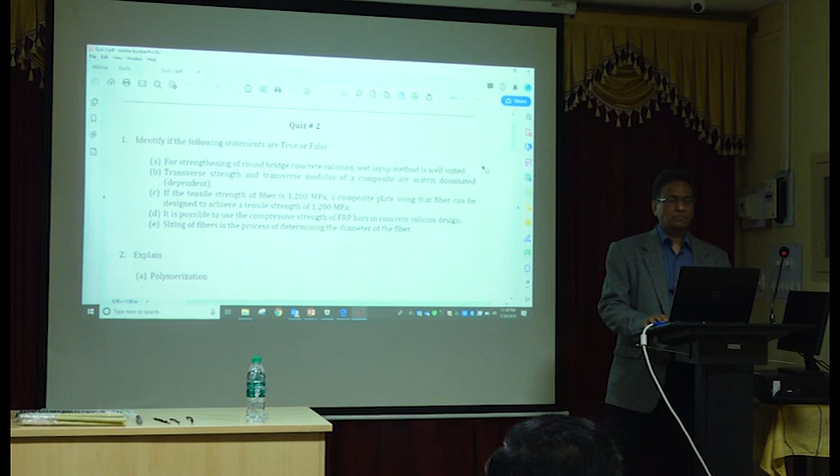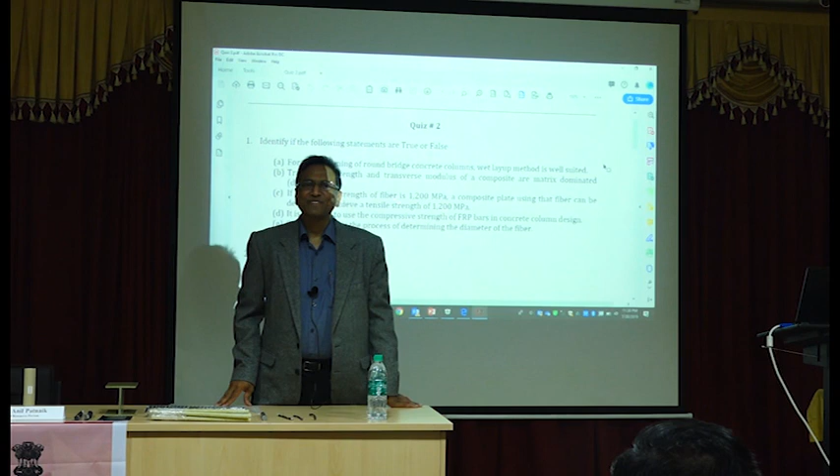First one, strengthening of round concrete columns, wet layup method is well suited. True or false? True. I mean, it can be true or false. If I don't seem to like the answer for true, you say, okay, false. No, but why? Why is it true or false? Yes, wrapping has to be done manually. Of course, you can do robotic, but that's also wet layup only. So, wet layup is well suited. So, that's a yes. It's true. Okay? Very good.

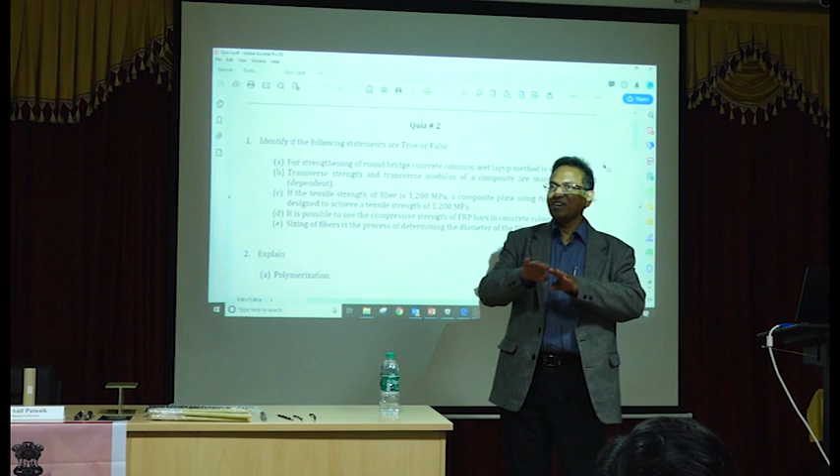Transverse strength and transverse modulus of composite are matrix dominated? Very good. True. That's correct. The longitudinal strength and longitudinal modulus, they are governed by fiber. Transverse strength, transverse modulus, everything is governed by matrix.

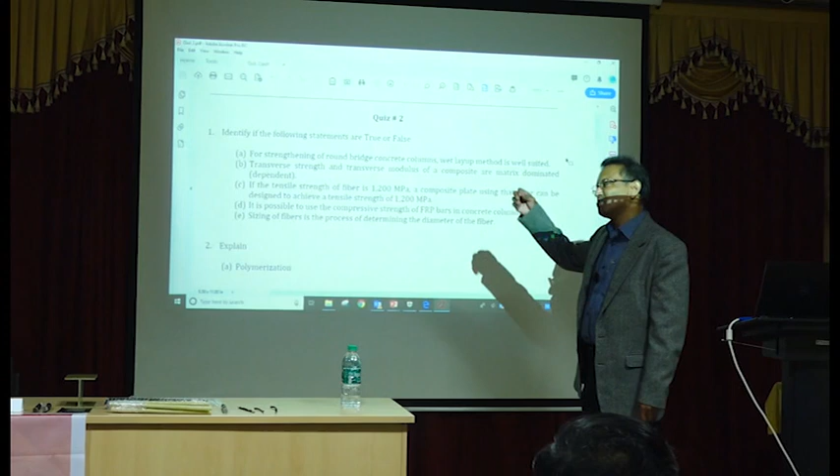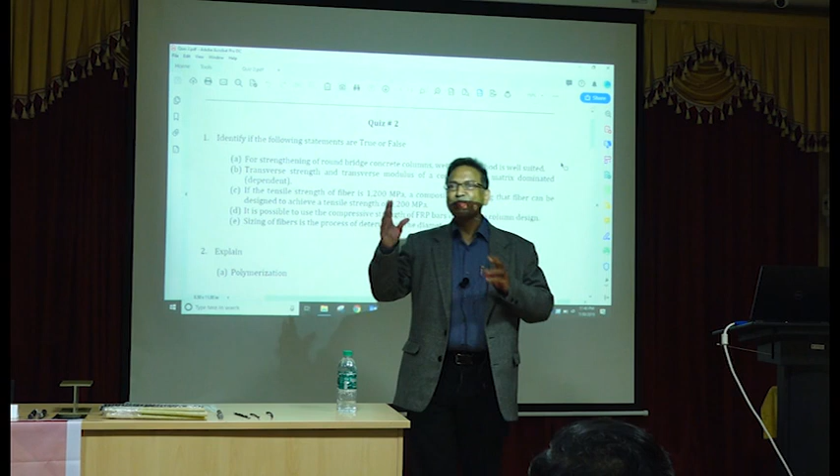Very good. If a tensile strength of fiber is 1200 MPa, I just picked a number, okay? A composite plate using that fiber can be designed to achieve a tensile strength of 1200 MPa. True or false? Why? So we will have some matrix. So that matrix will reduce the strength. So you can never ever achieve 1200 MPa. Okay? Very good.

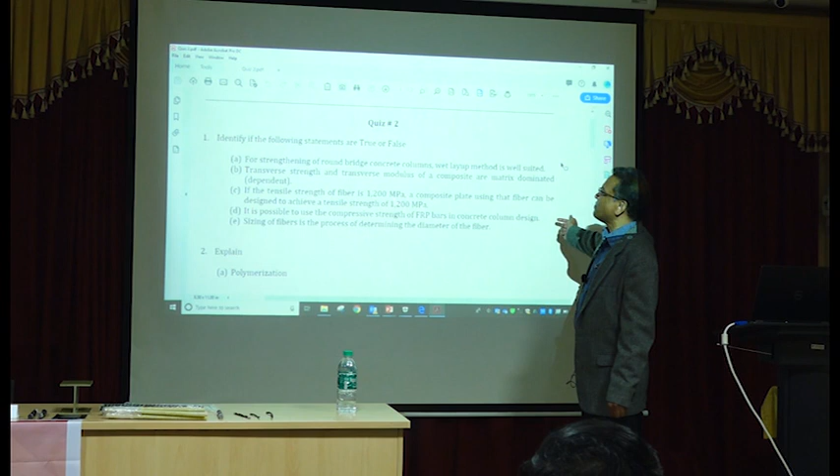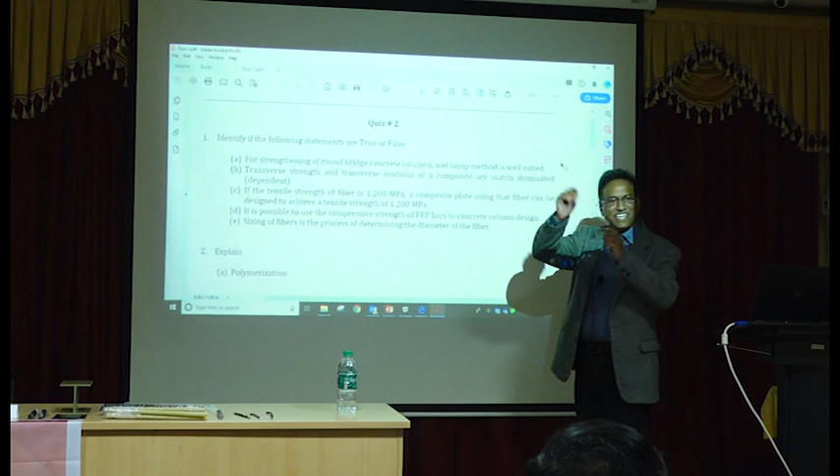It's possible to use compressive strength of FRP bars in concrete column design. False. We know that. Sizing of the fibers is the process of finding out the diameter of the fiber. Very good. It's false. It's not true. Sizing is a coating. Okay? Very good.

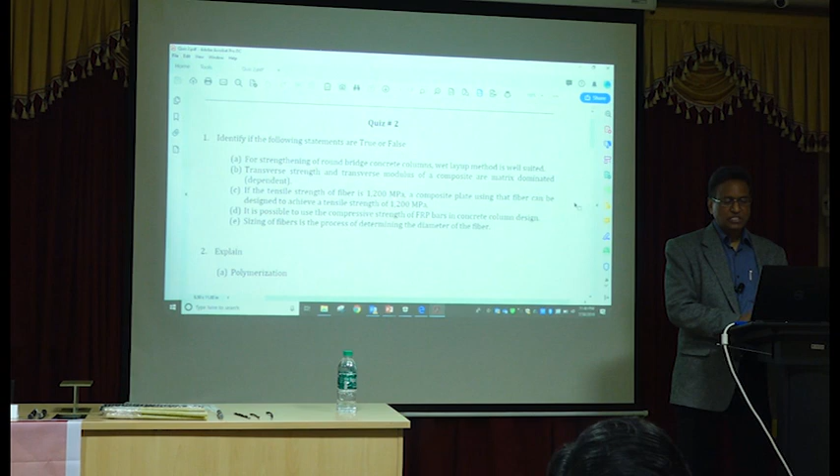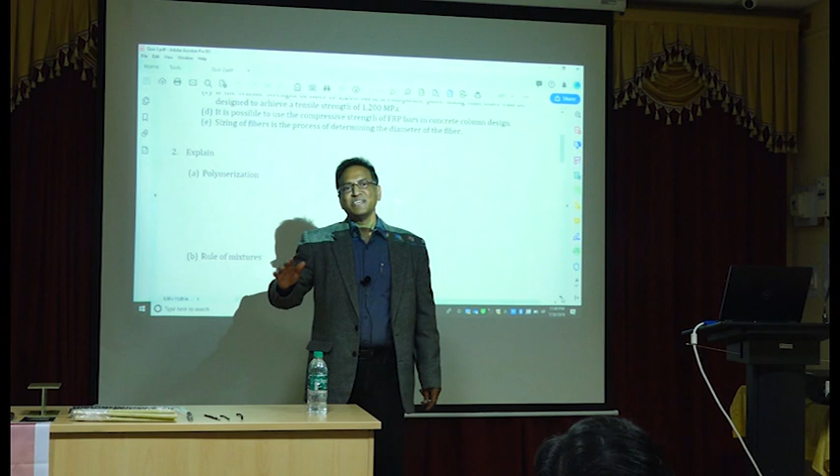So, can anyone explain what polymerization is? Just one simple sentence, that's all. It's a chemical reaction between the resin and the... Right. It's between two parts of resin. So once you start the chemical process, it's irreversible. The chemical process is completed by what's known as polymerization. Very good.

Rule of mixtures. The properties of the matrix composites based on volume basis. Right. But one other important thing is missing. Yeah? Right, but there is something missing. So assume strain is same in fiber and matrix. That's correct, but I am talking in general. What is rule of mixtures? What you said is right, but it's not completely right. Like there is something missing.

I'm sorry. Total volume of composite is... Yeah, that's where you apply, but there's something missing in our definition here. We did not mention one thing. Minimum being 4. No, that is something else. We are talking about rule of mixtures. Heterogeneous to homogeneous. Volume fraction maybe. Yeah, complete your sentence. Yes, thank you. That's the key word. In proportion. It's in proportion to the relative properties of each material. That's what is rule of mixture. Okay, that's correct. In proportion. That's the key word.

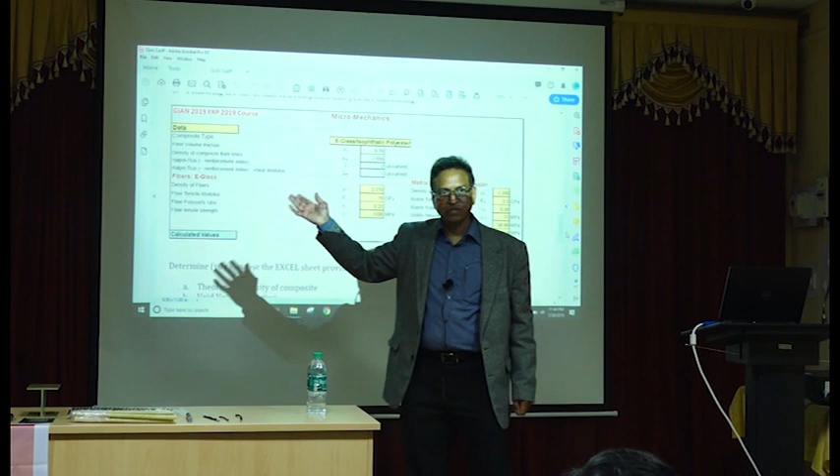Okay, did any of you try using this Excel spreadsheet? Was that all right? Oh, you didn't get it. Excel spreadsheet. Oh, sorry. We will send it. All that you have to do in this is plug in the numbers. We'll send it to you, okay? So all that you have to do is plug in the numbers in yellow cells. If you want to enter the numbers in any other cell, it won't let you do it because I protected it. So by mistake you won't mess up anything. So, okay, we'll send that.

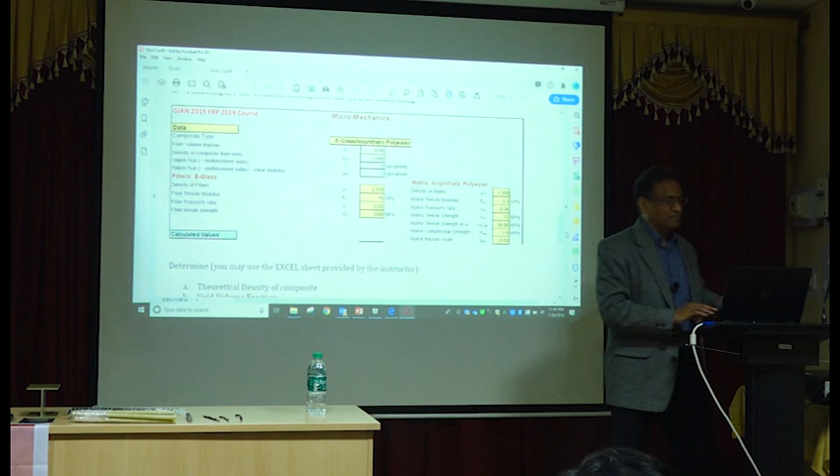Any questions from yesterday? So today we will first start with design philosophy. Dr. Das asked me specifically to tie IS 456 specifications with ACI specification, because I am presenting ACI specifications, right? So some of you may not be familiar with those specifications. So how do they tie with IS 456 specifications? So I'll spend a lot of time tying the two together, because at the moment there is no design guideline for IS or Indian standard compatible guidelines. If you are designing to ACI, just designing it using ACI document may become a little bit unsafe. Let me not put it as unsafe, but it won't be consistent with your IS 456.

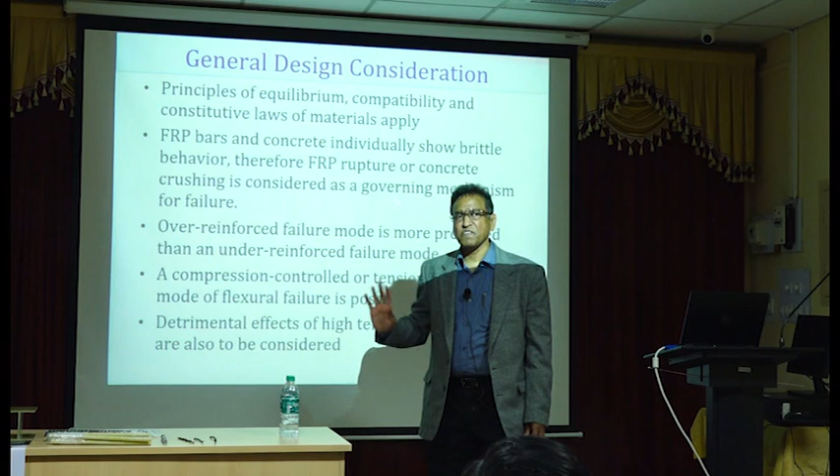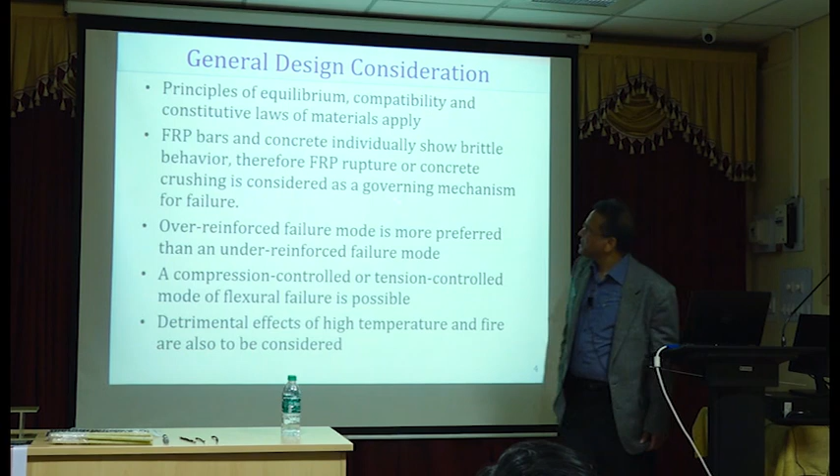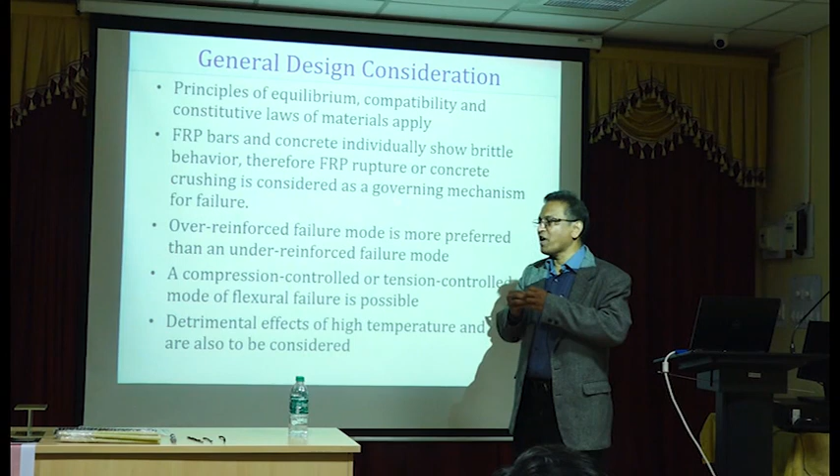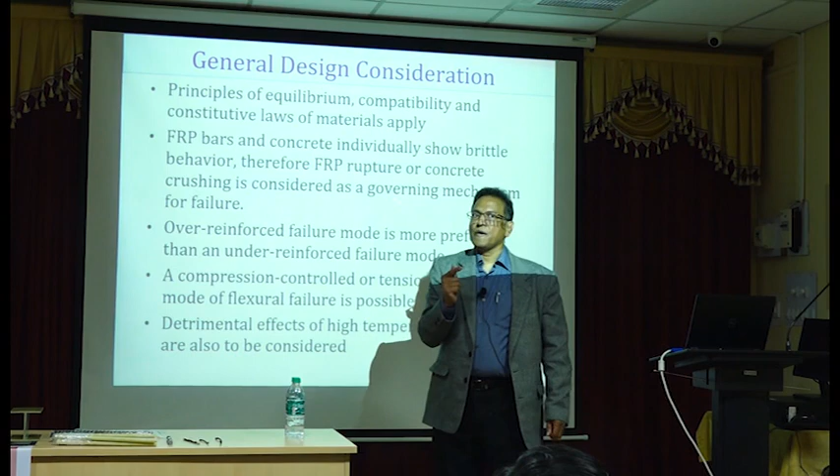Okay. Very good. So first we'll start with general considerations. Just what are the differences? In both codes, we will use equilibrium, compatibility, and of course stress strain curves of the materials. And then FRP bars and concrete individually show brittle behavior, therefore FRP rupture or concrete crushing is considered to be a governing mechanism. So what we are saying is FRP has a linear stress strain curve. Therefore, we don't know if there is some under strength of FRP material. If we design it to go all the way up to the failure, then it can fail in a brittle manner, right? So that's the reason we try to reduce the allowable FRP by guaranteed strength, and then we will design the section to fail by concrete crushing.

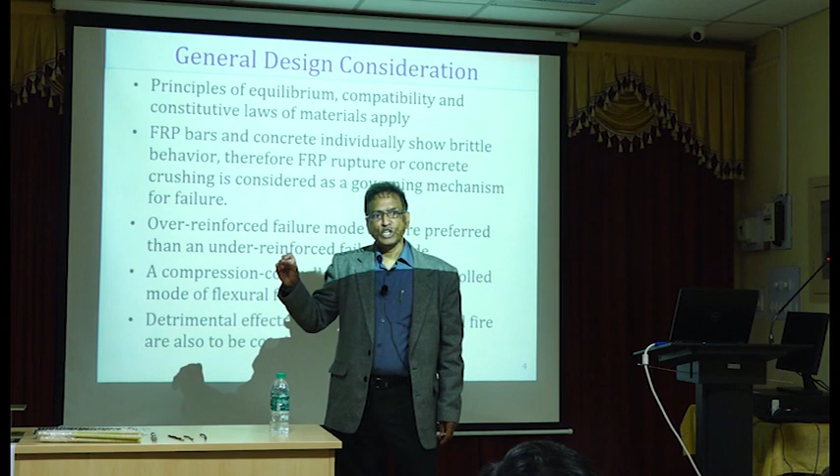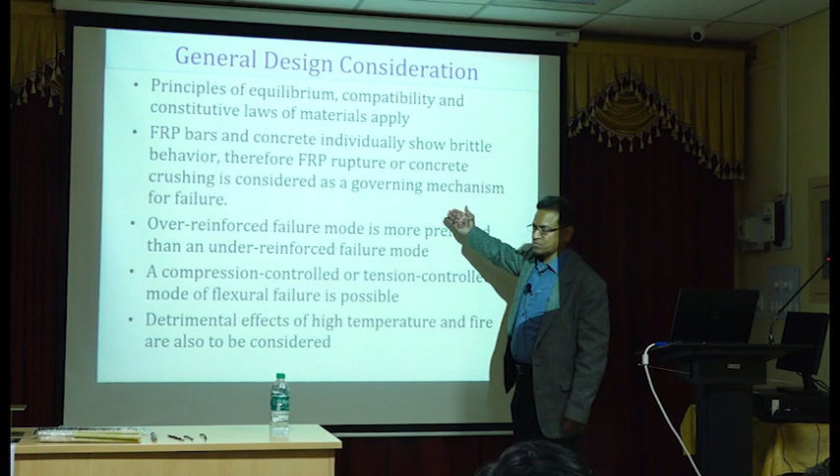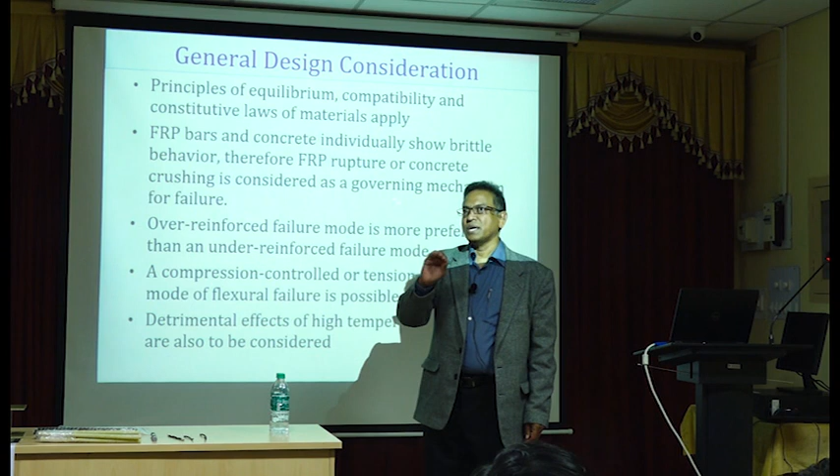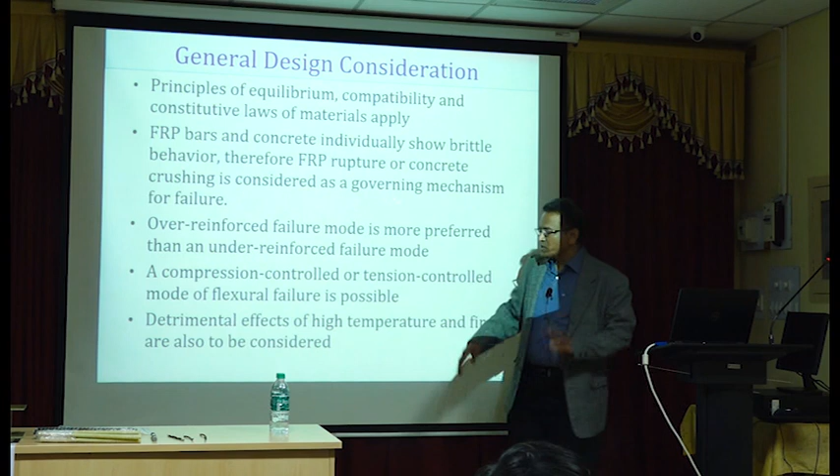So in steel reinforced concrete, we don't do that. We use under reinforced condition. Your IS 456 requirements automatically ensure that you are designing your members to be under reinforced. So that's a deviation. FRP reinforced beams will almost always be designed as over reinforced beams. It's also preferred because even though concrete crushing means the beam failure is not ductile, it is still more preferred than sudden snapping of FRP bar. That's the basis. So compression controlled or tension controlled modes of failure are still allowed. I didn't define what compression controlled and tension controlled failures are. ACI refers to compression controlled and tension controlled condition. I'll define that today. And of course, fire and temperature are always a problem.

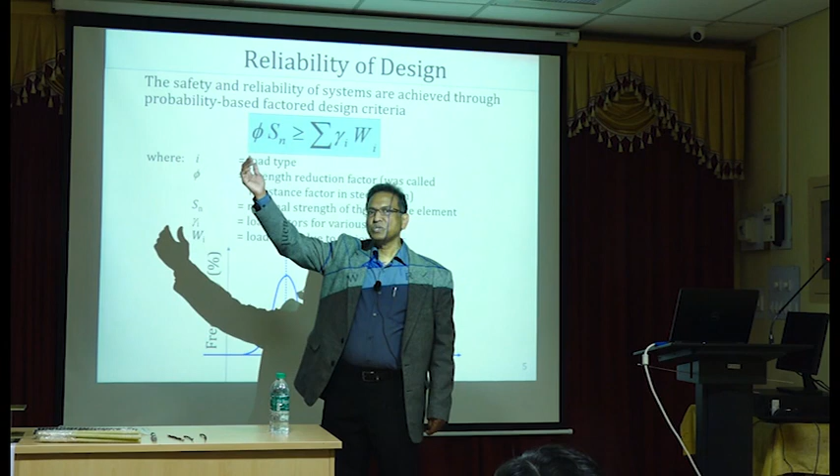So whenever you are designing in limit state design, you have a whole set of loadings and another set of strengths, right? Let's say you are testing 25 specimens. Some may fail at 100 units, some at 80, some at 70, some at 120. So just taking the average is not good enough. You have to also make sure there is some amount of reliability in your data. So, as I mentioned yesterday, we will shift this line. This is your curve for loading. This is the curve for strength. On the x-axis we have load or strength. On the y-axis we have frequency. So my strength always needs to be greater than the average loading, right?

The common area under the two curves is the probability of failure. So larger the area, larger the probability of failure. Smaller the area, smaller the probability of failure. So if I move this all the way to here, do you think this area under the two curves will be small? It will be small. Can it be 0?

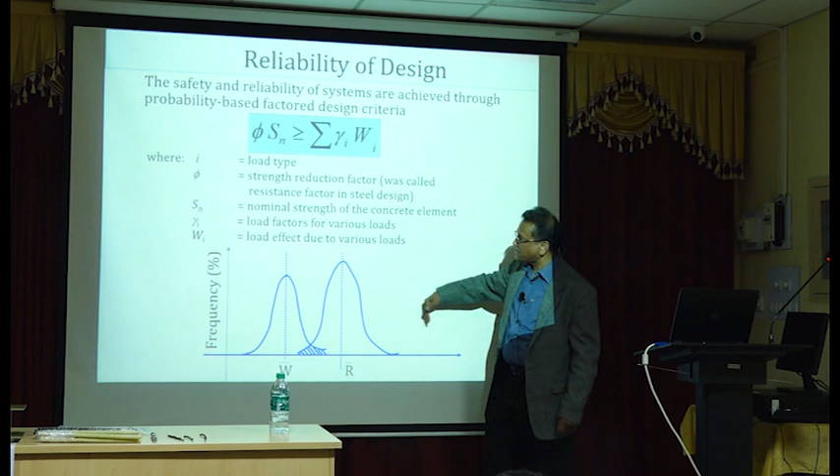Statistically it can never be 0, right? So even if I move this significantly to the right hand side, that means the strength of the element or member or material is increased substantially, this probability of failure will never be 0. That is statistically speaking. So we said, what is acceptable probability of failure?

And yesterday I mentioned 1 in 10 million chance is something we are already used to. Without knowing, we are able to accept a probability of failure of 1 in 10 million. So every time you start your car, there is a 1 in 10 million chance of getting into an accident. So that is something we are accepting. Therefore, we will make sure we have a probability of failure which is compatible with other activities of life.

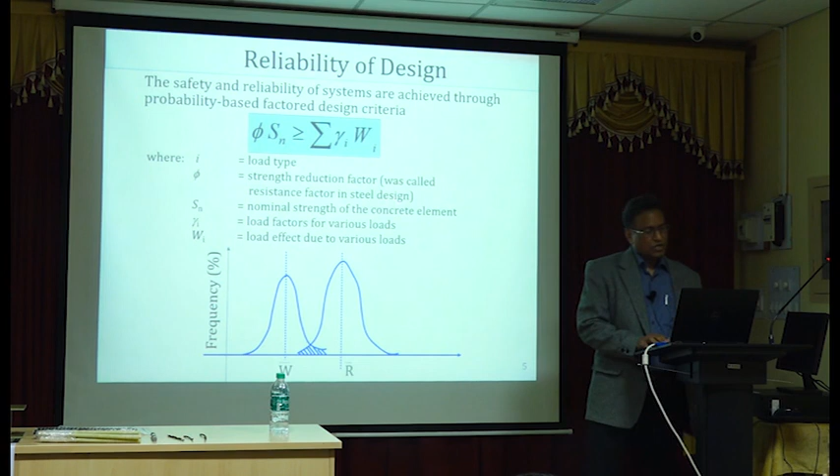So to do that, we use ACI 318, which is the design code for structural concrete. So American Concrete Institute design code for structural concrete. We have a phi factor here, and nominal strength; subscript N stands for nominal strength. U is the required strength or the factored load effect.

Both are the same. U is the required strength. This is the design strength. When you add phi factor with Sn, that becomes your design strength. Sn by itself is nominal strength. Okay. So unlike IS 456, which is following British standards, the American standards apply one factor, strength. This phi is known as strength reduction factor, and for each type of action, there is one strength reduction factor. I'll show you what those are in a minute.

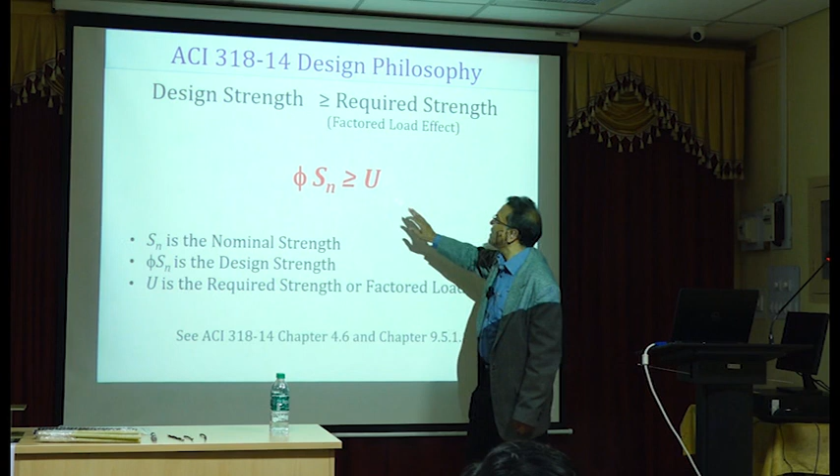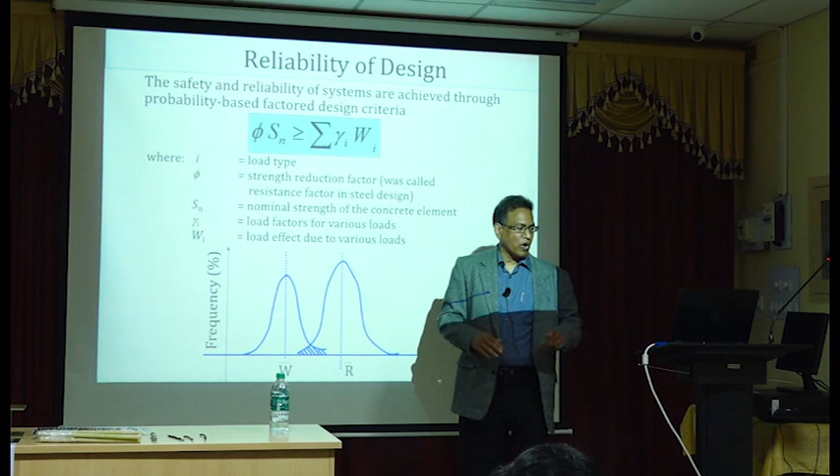So strength reduction factor, what do you think strength reduction factor is? Is it going to be more than 1 or less than 1? Less than 1. Perfect. So remember, go back to these bell curves. When you have a normal distribution, we are saying, even though my average strength is here, I would like to make sure it's slightly onto the right hand side. So we are minimizing this probability of failure. Same thing for what about the loads?

These loads, just like in IS 875, I think, is the loading standard. So in that we have load factors. Similarly, ACI also has load factors that are dependent on ASCE 07. ASCE 07. That's the loading standard for American designs.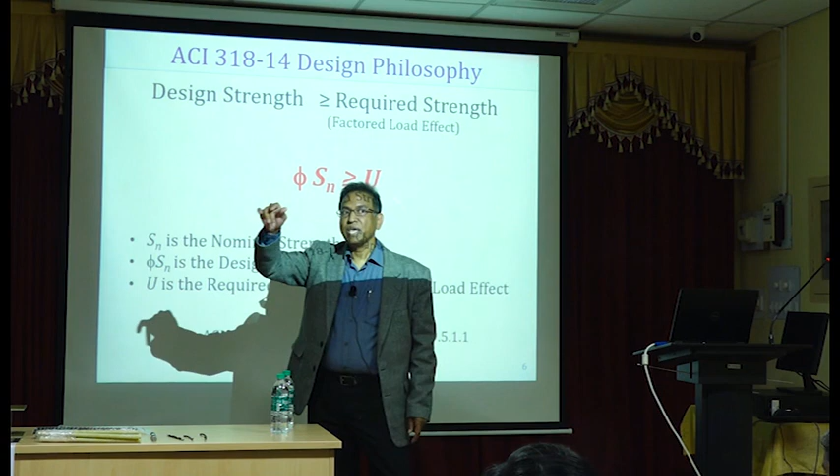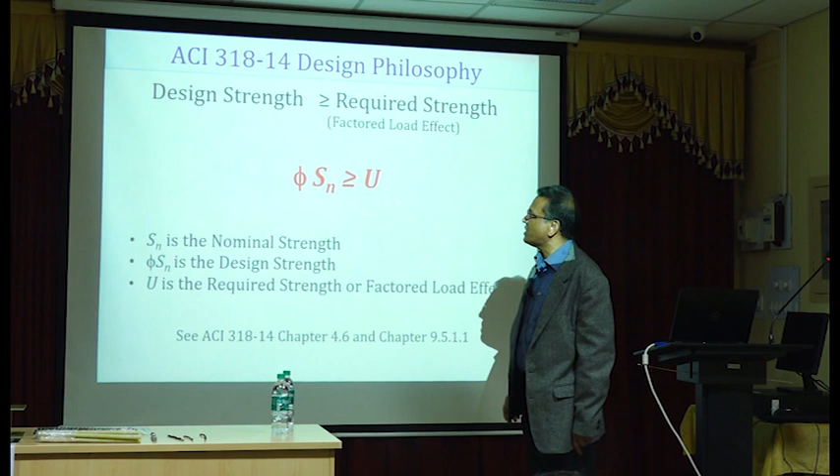Actually, this is interesting. A lot of design companies are actually designing for American conditions. I'm sorry. Okay, so they are sitting in Delhi, Mumbai or wherever, and they are actually designing for American companies. So they are using ACI codes and stuff like that. So there is a lot of potential, a market for that kind of consulting work in the US. I know this because I have seen some forums where people have some questions, and others reply and clarify the design requirements for ACI.

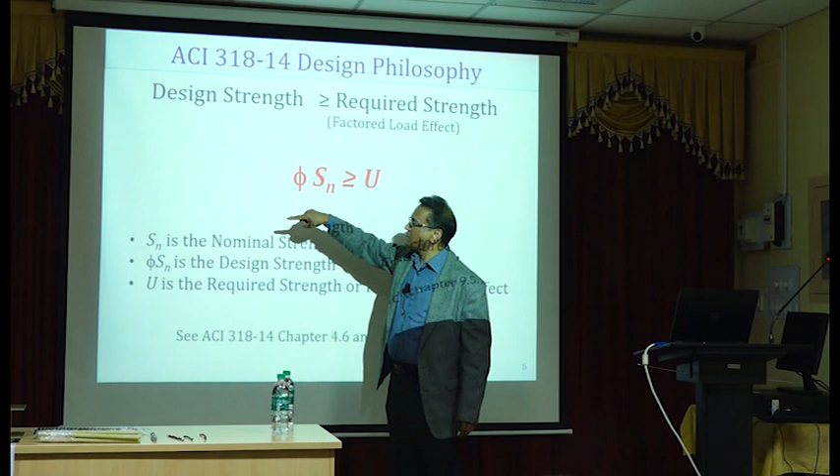So phi Sn is the design strength. So the difference is nominal strength, which doesn't have a phi factor, and design strength, which includes phi factor. So the moment you apply this phi factor, which is less than 1, this value is smaller, and factored loads are imaginary loads. They are not real loads, right? So factored loads are imaginary loads, assuming that there can be overloading on the structure.

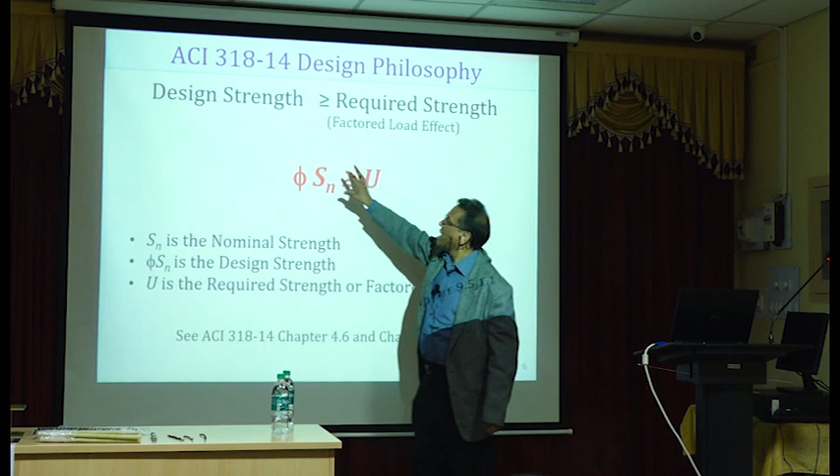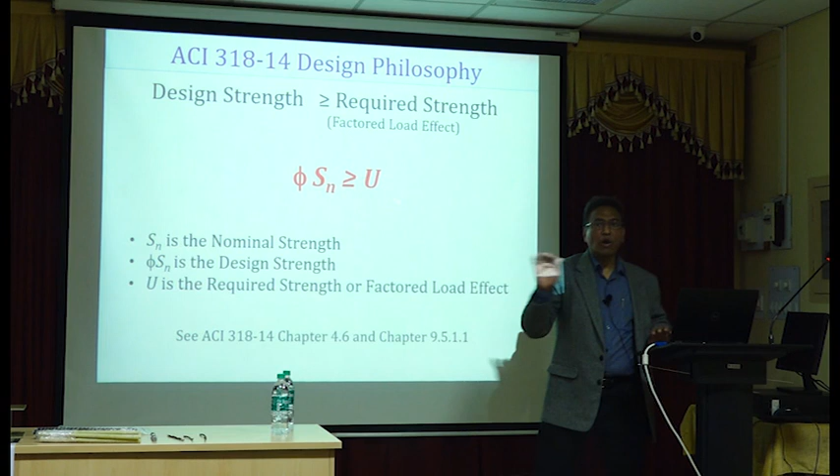You apply those loads. So you are increasing the loads on the load side of the equation, and on the strength side of the equation you are decreasing the usable strength. That's how you are able to get factor of safety. They don't call it factor of safety anymore, at least in the American context.

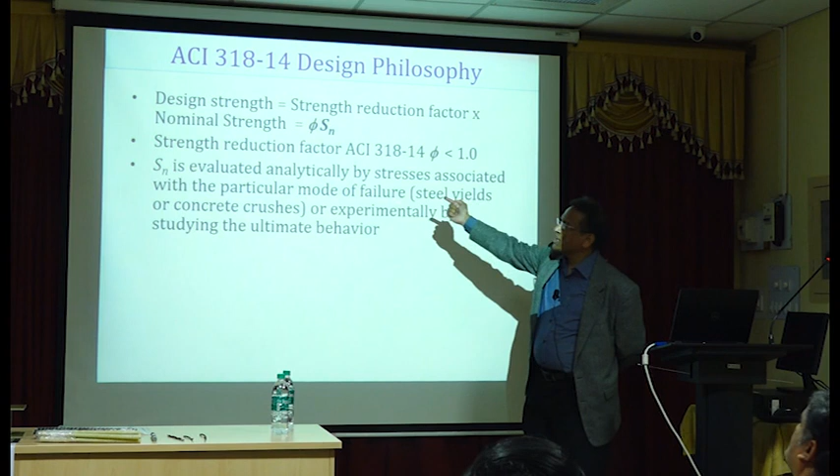So design strength, I mentioned this. Design strength is strength reduction factor phi times nominal strength Sn. All the phi factors are less than 1. You must find out your nominal strength based on material properties, stresses, mode of failures, things like that.

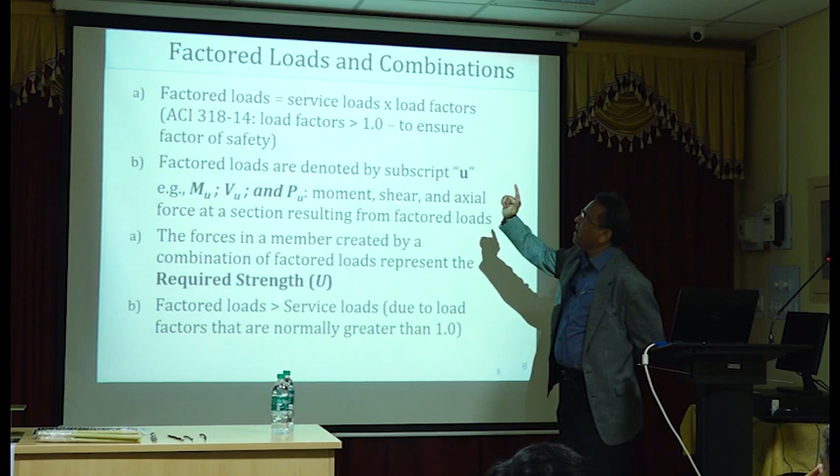So factored loads are always... This type. Oh, okay. Slide change. Slide change. Yeah, I can use that. Sorry. So, all right.

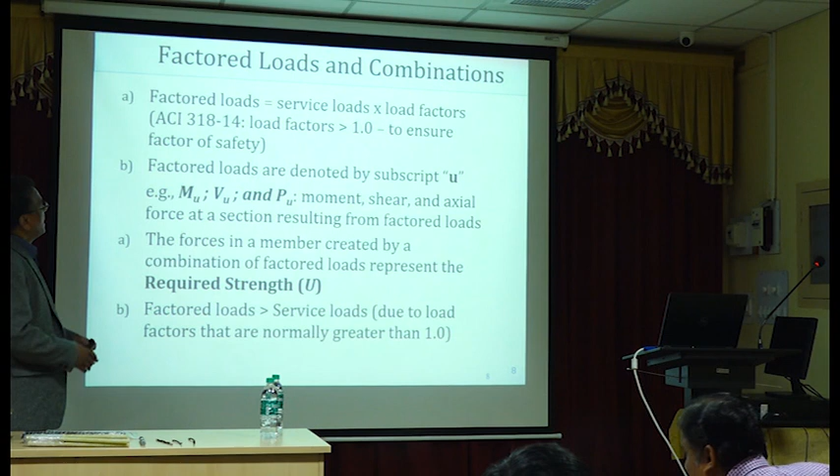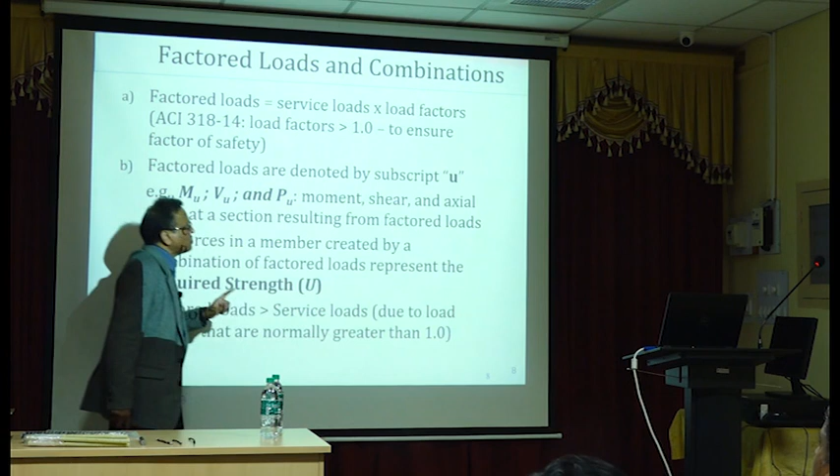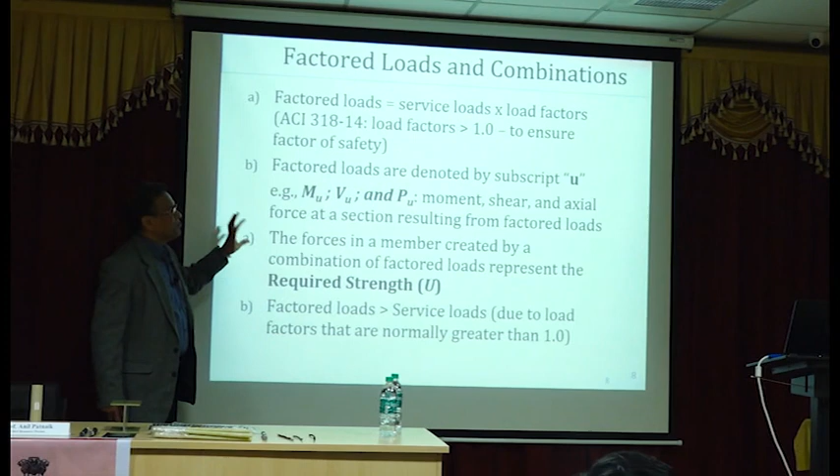So the load factors are greater than 1 almost always. Of course, in some cases it's 0.9 to ensure factor of safety. The notation of factored loads will have subscript u. So Mu, Vu, Pu is factored load moment, factored load shear, factored load axial force at a section, and you know this really well.

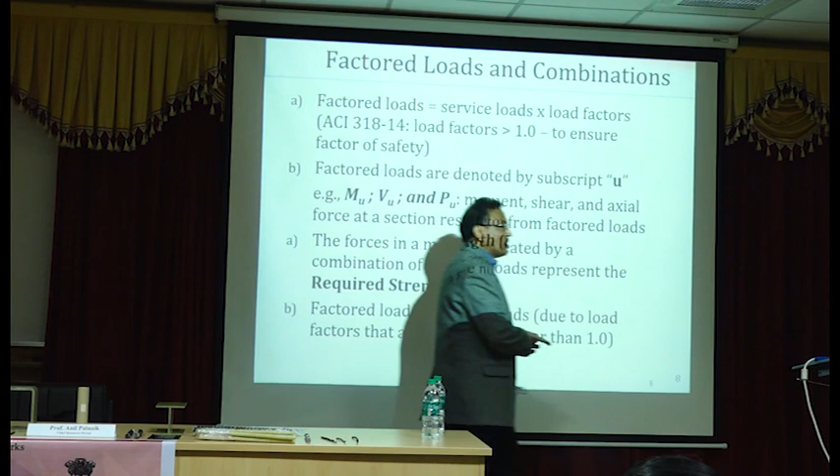So the required strength is the factored load effect. Factored loads, or factored load effects, will always be greater than the service load effects. That's what I mean.

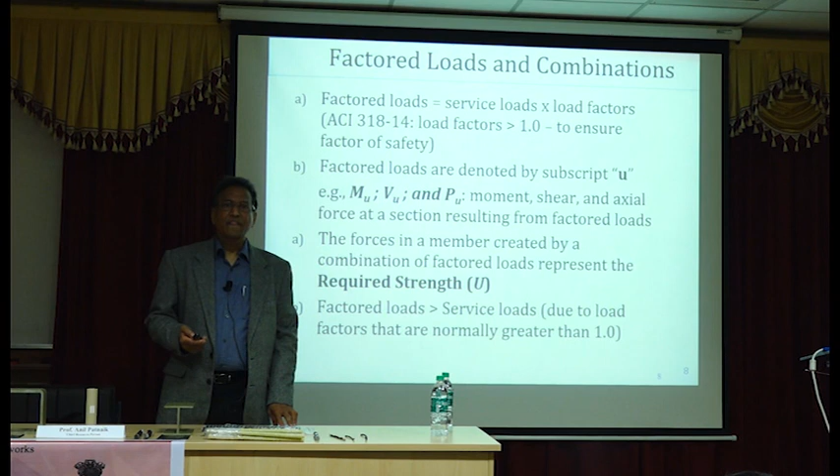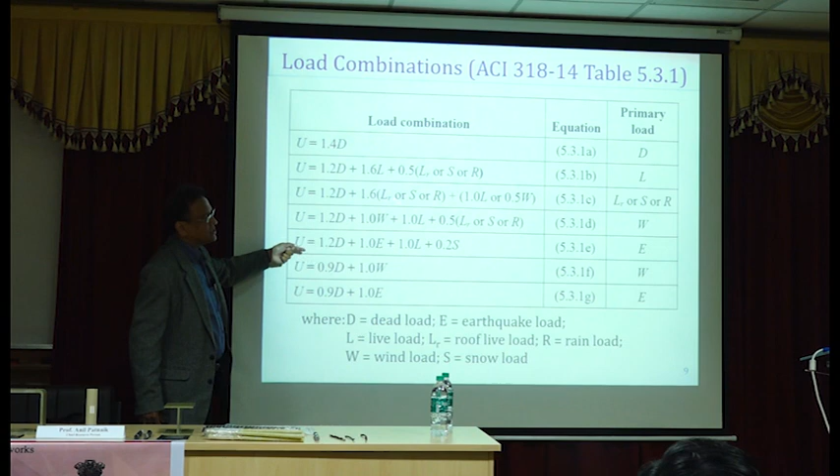If you have roof load, you can pick the larger of the three and multiply by 0.5. So this is normally dominated by live load. And of course, there are other combinations for earthquake loads and wind loads, okay? So that's how there is a difference. That's what I mean to say. What about phi factors?

Phi factors for bending vary from 0.65 to 0.9. So if it is brittle failure, over reinforced condition, you use 0.65, which is not allowed, by the way. If you are doing a new design, you are not allowed to design the member to be over reinforced. However, you will come across some designs where the situation is already over reinforced, like existing structures. You are doing a repair work or rehabilitation work.

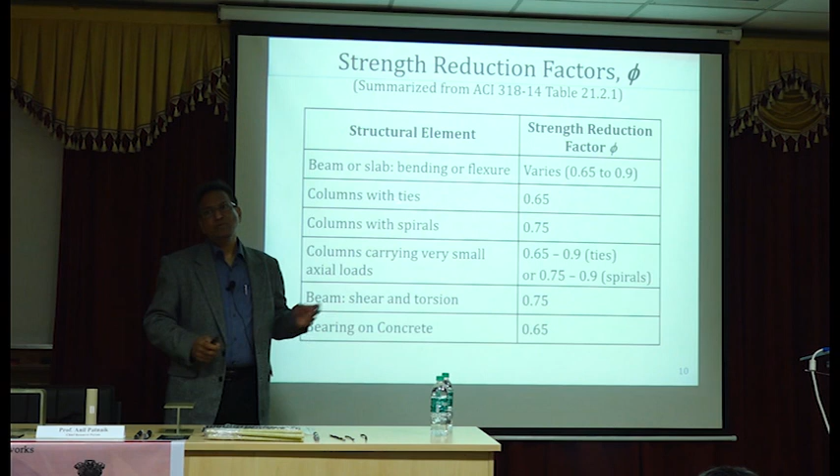There you have not designed it, and the designs were done like 20-30 years back when there was no requirement that it has to be an under reinforced section. For those things you may have to use the over reinforced condition just to be consistent with the existing design. But in any new design you cannot use an over reinforced section for steel reinforced concrete. We are talking about steel reinforced concrete at this time. It's very important for us to understand the differences before you start using ACI 440 for FRP design.

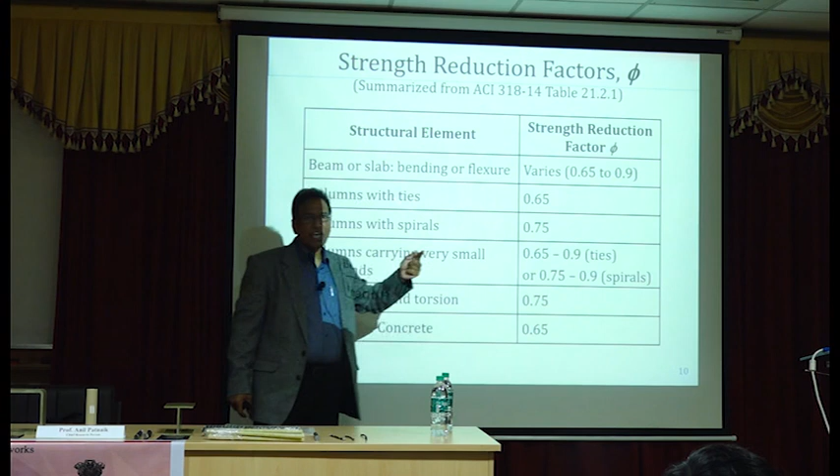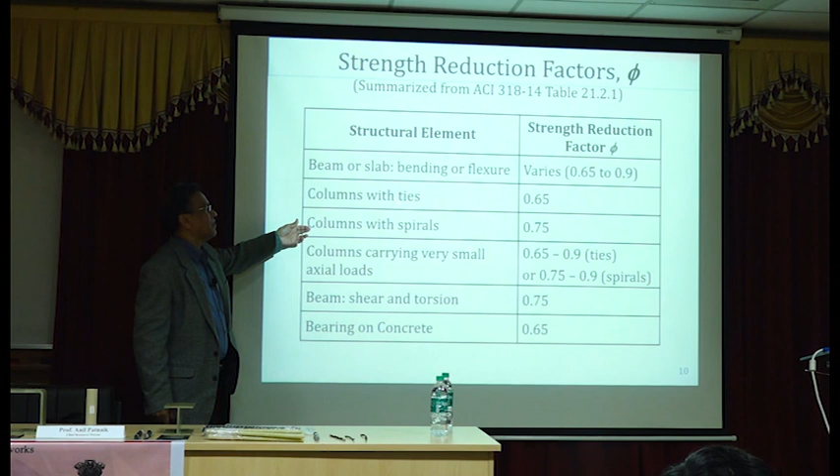Okay, so columns with ties, just ties, 0.65; columns with spirals, 0.75. Just like in Indian standard, in ACI standard there is a minimum volume of ties required, spirals required, and if you don't have that much minimum volume of spirals, you cannot use 0.75, you have to use phi of 0.65. So the columns must have adequate spirals to satisfy the requirement for volume of spiral within one spacing, and if it satisfies, use 0.75, which is a larger phi factor than 0.65.

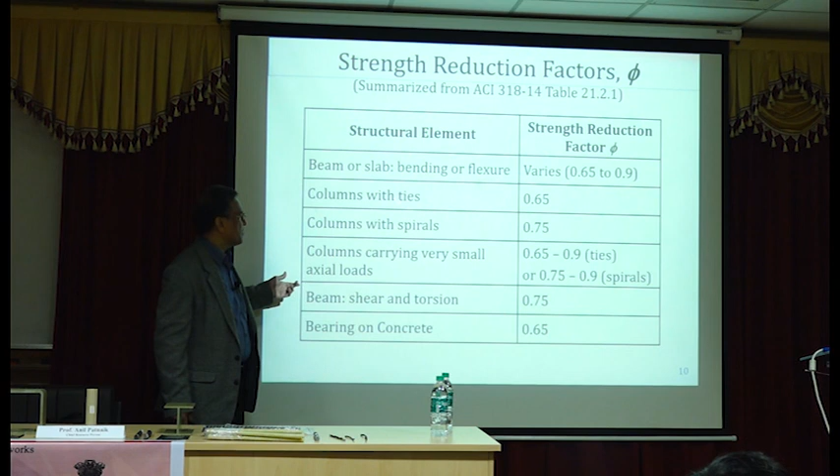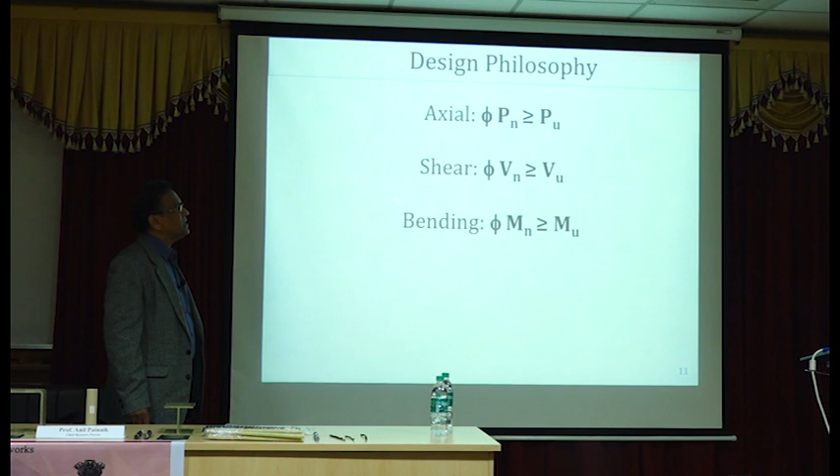So beam columns, it's probably 0.65 to 0.9 with ties. If it is with adequate spirals, it can be 0.75 to 0.9. Beam shear and torsion, everything related to shear and torsion, 0.75. Bearing on concrete, 0.65. Okay, so finally we need to make sure phi P sub n is greater than P sub u. So phi Pn is the design axial load strength, P sub u is the factored load acting in the axial direction.

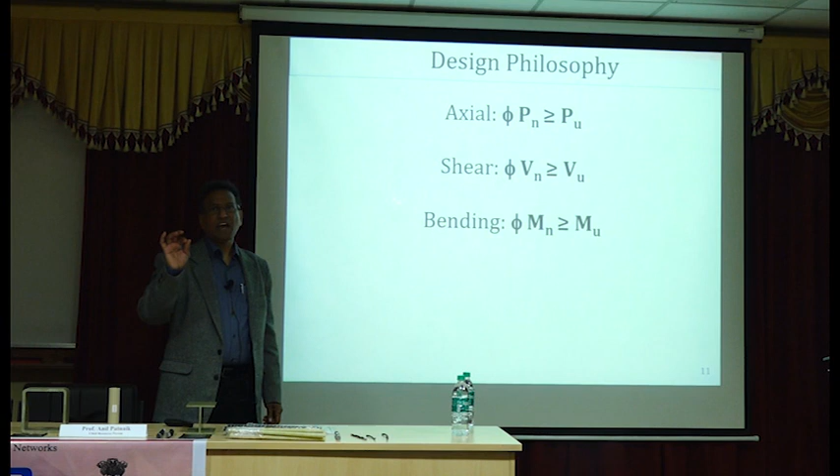Same thing with shear, phi Vn should be greater than V sub u. For bending moment you must make sure the design bending moment strength, phi Mn, is greater than M sub u. This is very straightforward, right? Only difference is in case of IS 456 we use material factors, safety factors for material, that's what I think it is called. Okay, so I'll just run you through this. You probably know this really well, but I just want to show you the differences.

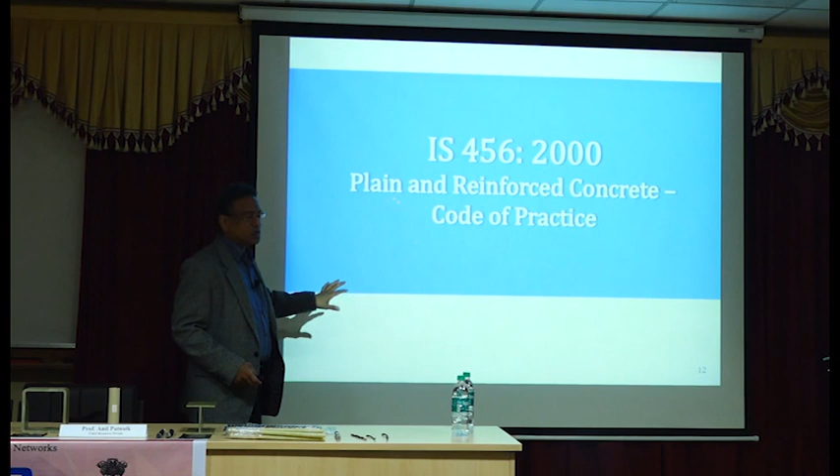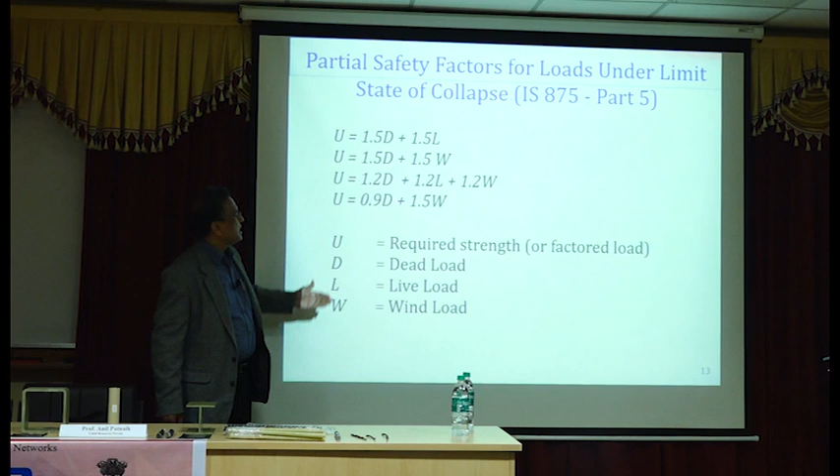In case of IS 456 we use factors of 1.5 dead load, 1.5 live load. In case of wind dominated loading, 1.5 dead load plus 1.5 wind load, so on and so forth. Okay, now this is a deviation, ACI and this requirement don't match. So sigma D, design strength of the material, equals sigma K, which is characteristic strength of the material, over gamma M, the partial safety factor for the material. For concrete you have 0.67 already with characteristic strength over 1.5.

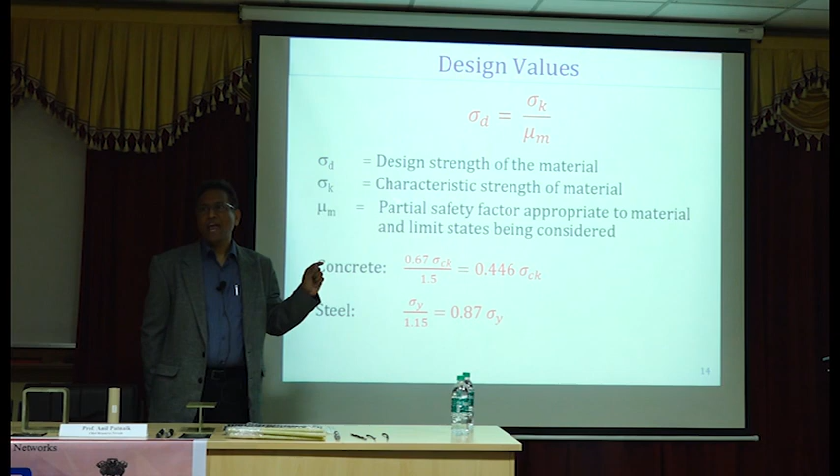So this is 0.446. It's a low value actually, relative to ACI. And in addition to that, you also have for steel a 15% premium, that's the 1.15 factor. So we are adding one factor to concrete, and also we are adding one more factor to steel. Whereas in case of ACI, we don't add individual material factors.